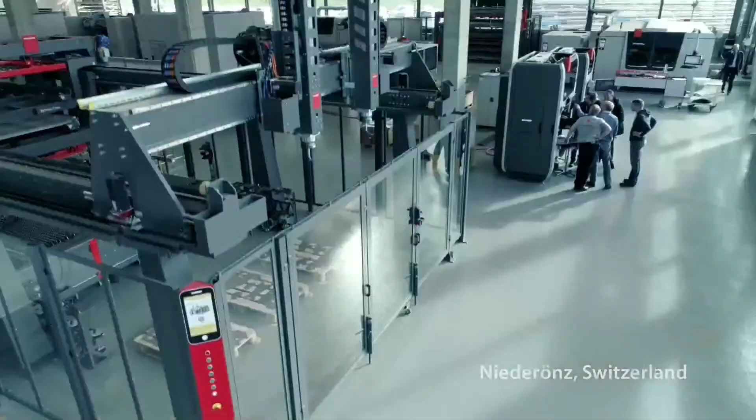Bystronic is a leading global supplier of system solutions for the sheet metal industry. We provide laser cutting systems, bending systems, automation, software solutions, and comprehensive services.

Sorry, I need a sip. He's good, no? Let's say he has a confident voice, yes. Shall we? Client happy, but please get to the end of the line this time and add a little verve. The verve is there. You may not be able to hear it right now, but you will in post-production. In post, we are in...

We offer worldwide presence and competence. We speak your language and understand your needs. We are here for you.

Sorry, we are here for you. I mean, I hear the words, but I'm not getting anything from them, you know? Could you please just say the lines?

May I? It means that we offer much more than just a machine. We support our customers with flexible financing models, training, maintenance, a long-term spare parts service, phone hotlines and online support. And we also operate local sales and support offices in many, many countries.

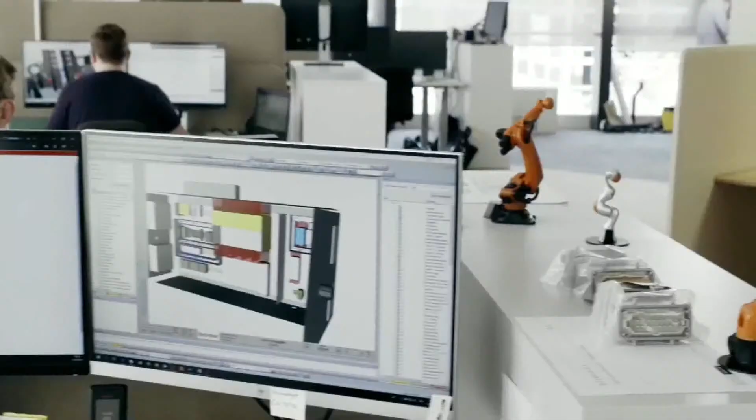We don't simply develop machines that cut or bend sheet metal. No, our customers need flexible systems for ever-changing order positions and batch sizes. Automation to achieve top productivity with integrated systems and the right software that cross-links everything.

Bystronic stands for Swiss quality.

Really? Swiss quality, I mean, it's a bit of a cliche, isn't it? And actually, while we're at it, your slogan, best choice, kind of sounds like we've just won the buzzword bingo. Guys, if you want to sort this out, I'm just going to pop out for a smoke.

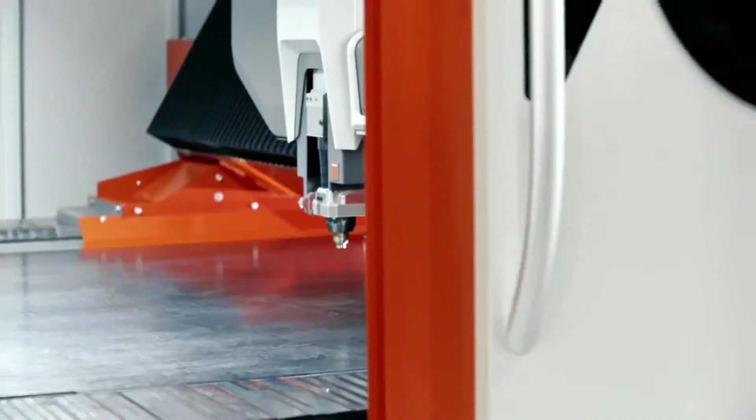Let me explain. First of all, Swiss quality. Do you know the Bystar Fibre? The Bytrans Cross or Bysoft? Have you ever seen them laser cutting and bending those sheets? It's like butter. Once you've seen it, you can't help but be excited. The beauty of a laser cut. The precision of a bent metal sheet, from very small to very large, but all with the precision of Swiss clockwork, perfectly formed and expertly fitted.

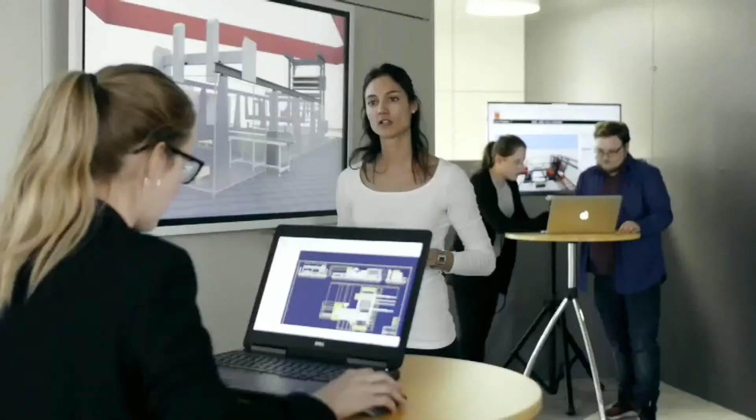Now, best choice. When you say yes to a partner, be it in business or private life, you make a commitment to the future. Bless you, Katie. Now, you're still young, but one day, you're going to want someone for the long run. Someone who shares your vision for the future. You see, at Bystronic, we think about tomorrow's sheet metal processing.

We have some footage of that, right? In what we call the Smart Factory, variable orders will be produced automatically on flexible systems. A clear vision and state-of-the-art technology means cost and process optimization, which in turn means higher earnings.

And who's behind this success? The employees of Bystronic worldwide. Now, you'll say that's just another cliche, but nobody else sets new standards like they do, with their enthusiasm, their ideas, and their know-how. Actually, I stand corrected, because our success is also due to our clients. It's their feedback that we use to develop new technologies. And until they are perfectly functioning, we will not launch them.

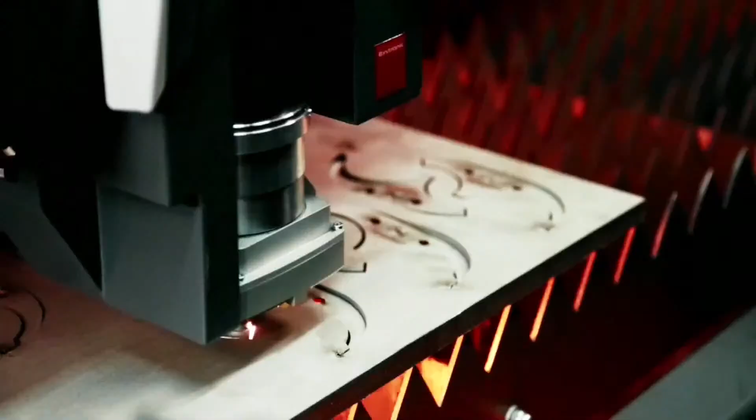And none of our employees will settle for less. Not in Asia, not in America, not in Europe, not in Switzerland, nowhere. And that's what we mean by best choice.

I'm sorry, I think I interrupted you. Did you record this? Sorry, did he say something? I couldn't hear a word. He says we're done. Really? That looked like more words to me. No, really, we're done. But you can stay here till 5 because it's in your contract. Well, no, I'm more than happy to do another version. We'll just reach my agent later on. That's no problem. Gentlemen? Hello?

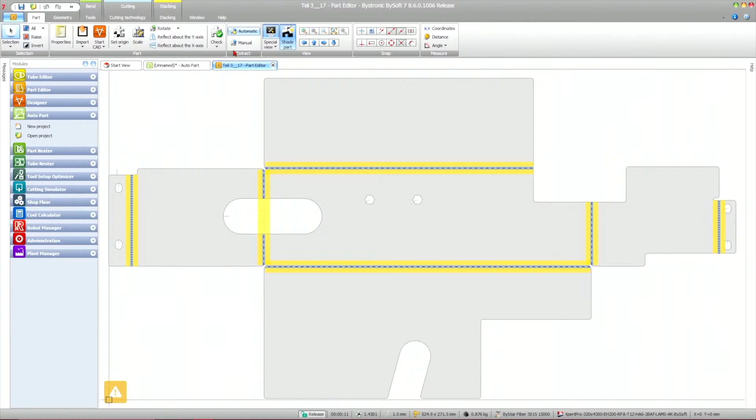Here you can see contours in the entry zone of the bottom tool. The software shows me quickly and easily where they are and highlights them with a yellow mark. Now I can automatically make a relief cut on the bend line and thus guarantee the quality of the part.

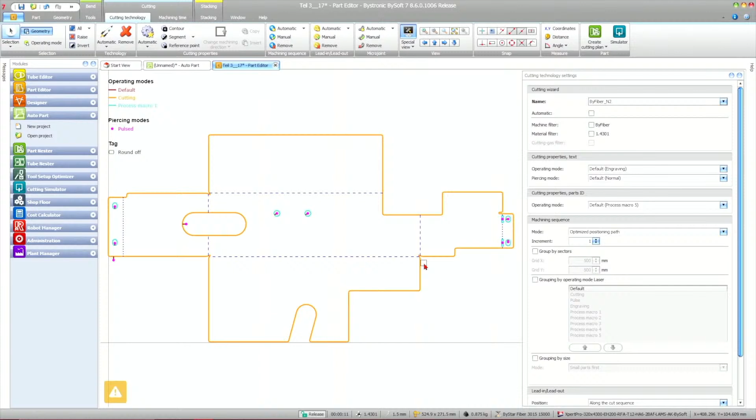Now I apply the appropriate cutting technology to the laser and save it. BySoft 7 processed all parts correctly and generated a laser and bending program. Now I can switch to the Tool Setup Optimizer module to generate a bending job for my machine.

I can now see the optimal sequence for these bend parts. I can see exactly when a tool change has to take place in order to manufacture the components as quickly as possible.

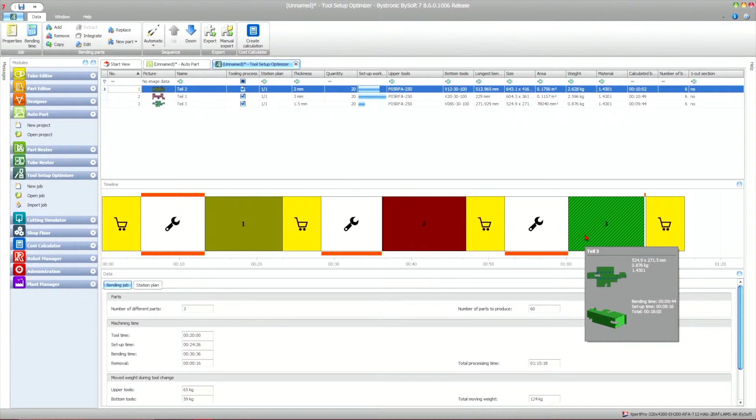In addition, the machine operator receives the ideal station plan, so that he always knows in which order he must install the tools on the machine.

What is still missing is the part cost calculation, so that I can send the offer to my customer. I do this with our module Cost Calculator. With this module, I get the cost of all my operations for my components within a very short time.

Bysoft calculates the material costs as well as the process costs for the components. Of course, the actual material consumption, as well as the number of pieces and the theoretically determined cutting and bending times, are also taken into account.

I can now send this offer to my customer and hopefully get his order just as quickly. With Bysoft 7, it can happen that easily.

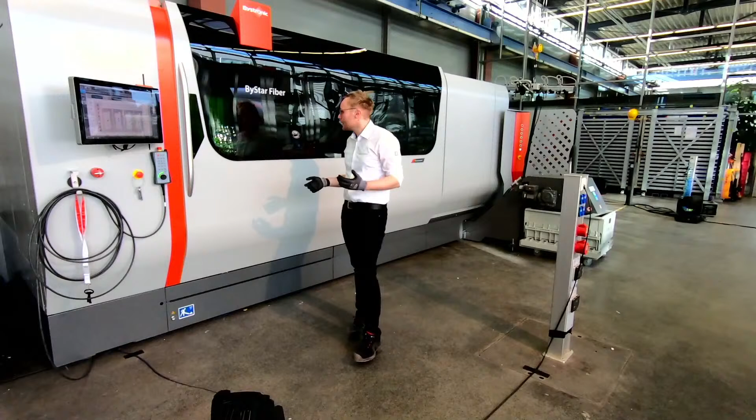So now let's start to cut. As part, we have prepared a 30mm mild steel part for you, to make sure that we can show you also the big parts, and this part we will use later on for something new. My colleague Carsten and Benedict will talk for this. And with this we can click on continue to start the cutting process.

So now the machine will start to cut the part. Yes, we will cut the part. We have two holes in it, a big gap. We start with the big hole, and we will have two holes with 30 and 25mm diameter, and we will have the outside contour.

You will see that we need some time to pierce into the material. It takes some seconds, but then we have a good and straight cutting time, which means that we are quite good. We cut now the part.

What we can also say is this machine has been set up last week, so we had finished this machine nearly at the beginning of this week. So it's brand new. On Monday, in our late night event we did for the German market, we put away the foil. We uncovered that machine together with Carsten, the boss for the demo center here in Gotha, and then we cut the first parts with that machine.

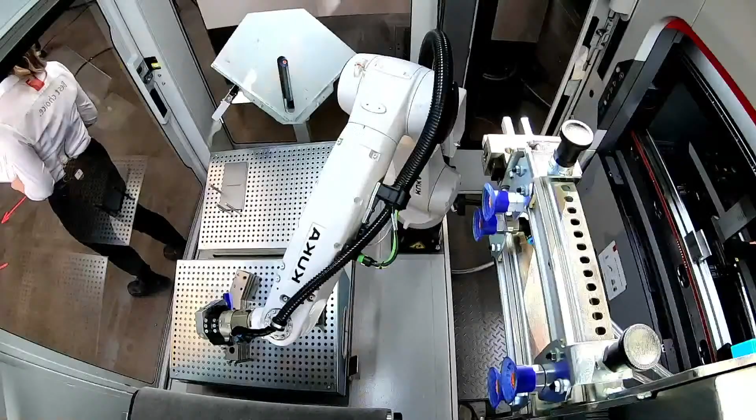So thank you, Eric, for this good news. This 30mm part is not only there to show you how fast and efficient we can cut even in thick material on our Bystar 15 kilowatt laser cutting system. It's also a part of Bystronic's future. Carsten, can you tell us more about Bystronic's future?

Thank you, Eric. You have been with us at the moment when one of the parts was born for our new Bystronic 120. That's a new upcoming bending machine. This will be the start of our new flagship series as well. It's the Bystronic 120, a new bending machine we will launch later this year. You have now seen one of the first parts. What is the highlight?

We can cut now these parts of the machine, for example frame parts. The frame is 30 millimeters, cut with our own laser, very efficient. And that's what we wanted to do here now with the first parts.

The Bystronic 120 is a new product. The idea came out when we did a workshop with customers. We do this several times a year with different groups to find out what new products are interesting for the market. This workshop was dedicated to automation, mid-size automation specifically. We already have the mobile bending automation for the Xpert 40 and Xpert 80, and we have the big automation, the bending cells, and we got feedback from the market that we need something in the middle. In this workshop we discovered we need also a new bending machine in the middle, not just the automation in the middle.

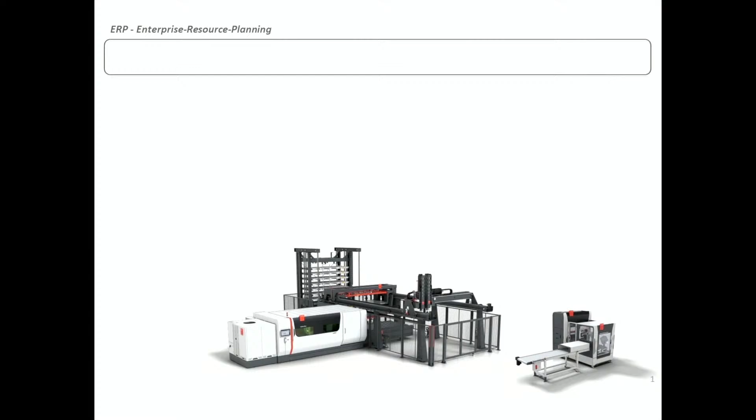Imagine your sheet metal production as follows. For example, you have a laser system with automation, a small storage tower behind it, a clearing area, and an automated bending machine. The entire production order, from quotation to shipping and invoicing, is managed in your ERP system.

You receive the parts from your construction, or as 2D or 3D data from your customer. The NC programs for your machine are generated in the production planning and programming department.

At the beginning, the customer's production order is created in your ERP system. All other data is thus already generated in digital form. At the same time, CAD data are also designed or made available, and these must now be transferred to work preparation.

This is where the Plant Manager comes into play. The Plant Manager is a module of Bysoft 7 which combines the order between the ERP system and the production. By using an XML interface, all production order data and also the CAD data can be automatically transferred to Bysoft 7. This means that the parts list with article number and material quality, as well as the number of pieces and the end date, are linked with the correct CAD data and automatically imported into the Plant Manager.

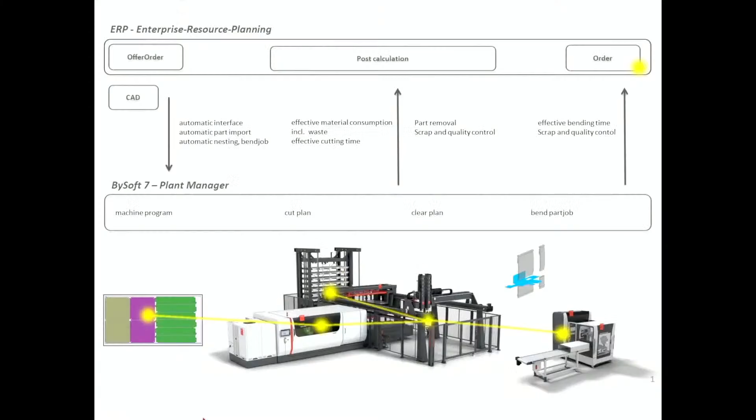Let's assume my customer ordered the parts and I want to manufacture them. The Plant Manager runs as a service and is installed on your server, so it works 24 hours a day, 7 days a week. If a production order is now created in the ERP system, it can be imported automatically.

In this view, I can now manage my orders. Open orders can be processed immediately. Incomplete ones require further information from the operator. My current orders are also clearly displayed.

In my example, I have a Bystar and a Bysmart Fiber with different laser powers. There are also 2 bending machines: 1 Xpert 250 tons and 1 Xpert 320 tons, each in 4 meters.

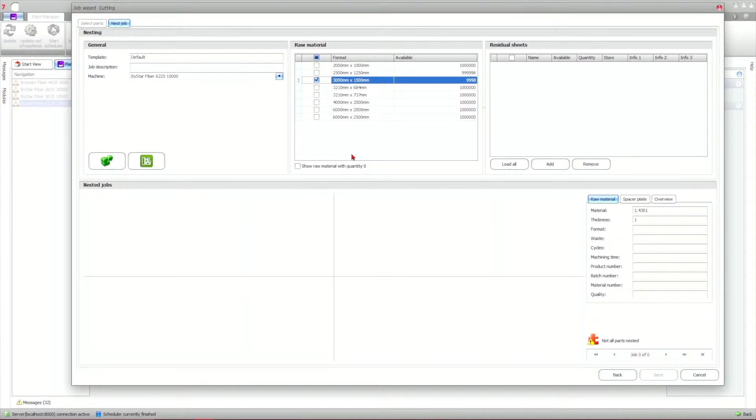Perfect nesting plans are now generated for the respective material and the respective machine. Residual sheets are automatically engraved and saved in the administration. All of these jobs are automatically scheduled in the calendar.

The bending jobs are also generated with a job assistant. All bending programs are planned in the perfect order on the machine.

You already know the module. It is the tool setup optimizer, which is executed automatically in the background and guarantees you an optimal bending sequence on the machine.

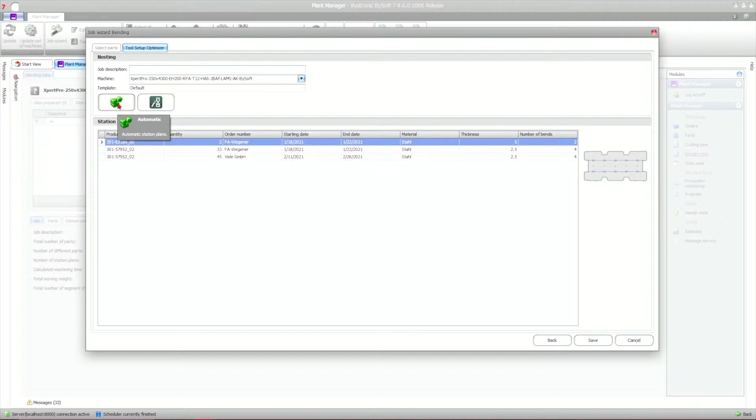Thus, all machines are perfectly programmed. To remove parts from the laser machine, the part removal module is available.

In the part removal program, the cutting plan is shown in color according to the order number, or according to individual adjustable categorization, such as the customer or a subsequent work step.

With this information, your machine operator clears the cut plan in the shortest possible time and sorts parts onto the correct pallets with little effort.

In addition, batch tracking and residual sheet management can be maintained via this module.

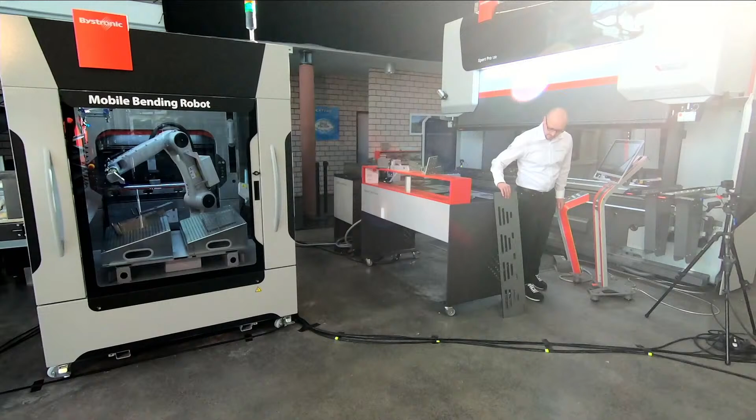Before we bend the part for the crowning, I'll explain a little bit later how you can program a part onto the control. You've seen the offline software BySoft 7. Of course, we can program the machine over this, and we can also use the control to program a part.

We go to new geometry, and then we can start to program the bend part. Let's say, like this part, we have 5 bends. This is really simple. We have the left side to draw something, and we have also the right side of the screen where we can type in main information about the material, the thickness, and the tools.

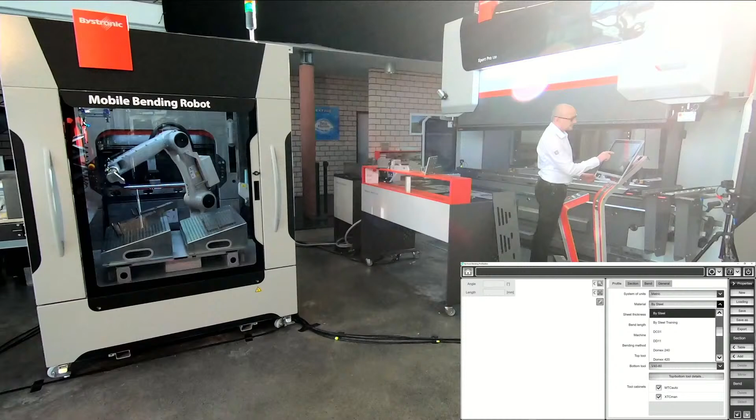A little bit explaining from top to bottom. Here is the selection of the material, then we have the material thickness. If you type in, let's say, 1 millimeter, we get a selection of the tool. You can adjust this to the best tool for you.

If I change back to 5 millimeter, this material is 5 millimeter, then we define the tools P7 and the B40. If you like to change, you can change it here in the list.

Maybe for the operator, they like the graphical view more. You have also the graphical view for top tool and bottom tool.

Okay, now we have the main information. Of course, the bending length we have to adjust - this is more or less the right one. Let me type in the exact bend length, and then we can program or draw the part.

We start on one point, and then we can slide with the finger over the screen to adjust the bend length. You can also type your part like this, 1, 2, 3, 4, 5 bends.

We also have a table or list view, and you can adjust your part over this as well. You see we have every time 50 millimeter bend length - this one I have drawn 60, and here we go also to 50, and the last one is 50.

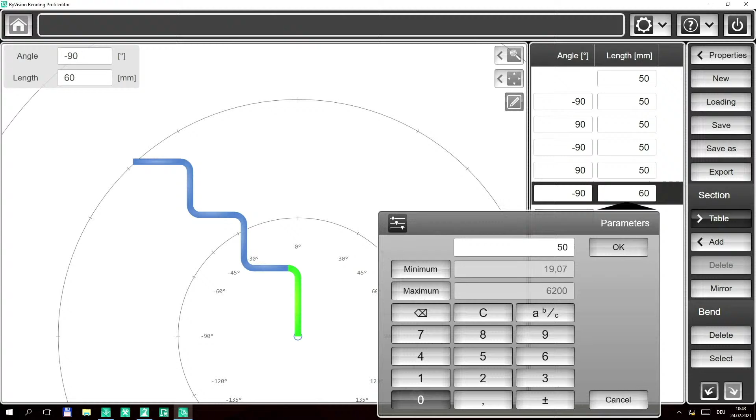Then we have our part. This looks like this. If necessary, you can open the properties field. In the section you also see the blank size - sometimes it's necessary to check if the blank part is the right one you'd like to bend.

If you go to the bending back, we simply just press the produce button - this little wheel on top - and the software goes into the produce area and calculates automatically the right bending sequence.

Of course, I need some tools for the part. You see there are some tools, but I need a little bit more. We can go to the tool setup plan and adjust the tools or place the tools manually.

On this machine we have the tool changer, so we can also use the tool changer. I switch just to the software for the tool changer. You see the green tools are the tools we need, and the blue ones are the tools already in the machine from the job before.

We simply press the start button, and then the machine changes the tools. During this time, the robot changed the tools. We will later explain a little bit more about the tool changer.

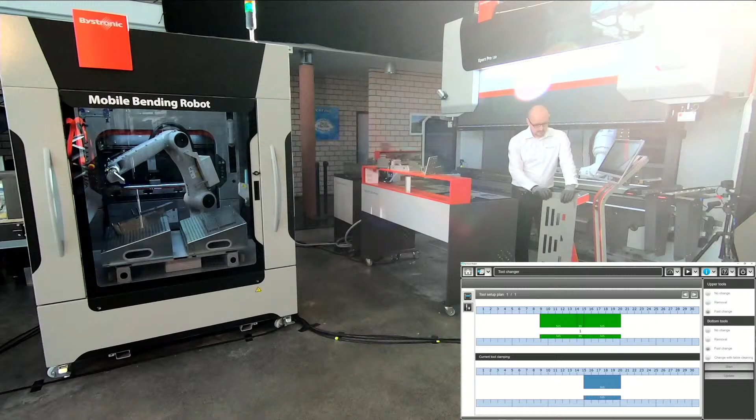I would like to explain the bend part a little bit more. For this part we will bend this. You have seen I have programmed the bend length for 1 meter or a little bit more, but in this part we have some holes inside that we can use to explain what dynamic crowning means.

Dynamic crowning means that we are measuring during the bending process what has happened during the bending - did we really need the calculated force, or did we use a little bit more or a little bit less in our case?

In this time, the software or machine automatically adjusts the pressing force and the crowning system. We have some additional compensation systems inside the machine - compensation for the side frame and also temperature compensation. Maybe we can look at this information later, and then you'll see what the machine is doing during the bending process.

In our case, we will first look at the crowning. Of course, the crowning is necessary to have a straight bend over the whole length of the machine, and also to have the same bend angle in the middle and on the right and left side of the machine.

Okay, the robot is finished. We will go back to the produce area. Let me switch on the compensation area and the crowning.

Here you see also what the machine does during the bending process. First of all, you see the machine adjusts something. I will bend just a small part, this little shape. I place this on the tools, and we do the first bend just with this little part. This is to check that the angles are correct on every step we bend.

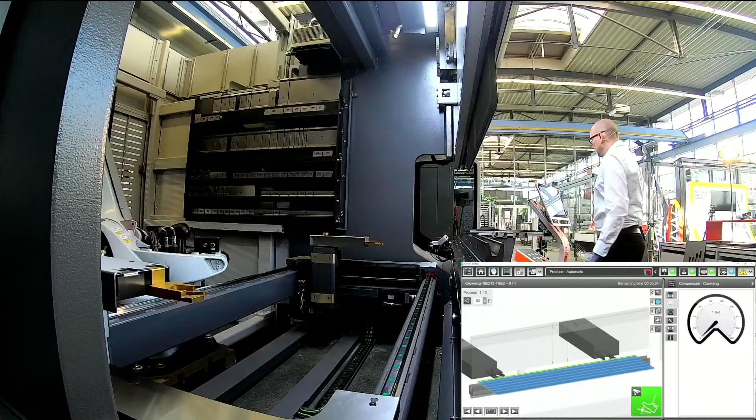Later on, you can also see on the screen on the instrument that we don't need so much crowning for this small part. First of all, of course, the safety system moves down to the right position of the tool. Now everything's okay, the safety system is green. This means I can move the machine in fast speed down. Then we do the bend.

Let me place the small part here on the side. Later on we need this again, and then I bend this part. You see, I go to the first step back. Of course I have to bend all the bends, and we start with the part with the holes inside. Then if you have a look for every bend on the control, you see that for every bend we get more and more crowning.

So during the bend we are measuring the real force on the left side and on the right side on the machine, and in this time we are in real time adjusting the crowning system and also compensating the side frame deflection.

So now we are on the middle of the part. The second to last two bends, we have more and more material, and you see that we need more of the crowning. Now we get the last bend, and this is the most crowning we need for this material.

And then we are finished. Let me place the part here on the side so you see it. I remove it, so this is the part. The first bend we did was this, and this is the last one.

And you can remember I bent the first little part. This is this one. If I place this here on my part, then you see this is exactly the same angle - there's no wobbling or whatever. The angle is on every place on the part, of course, the same one.

Why we are adjusting during the bending sequence the crowning and also the side frame deflection - let me go fast back to this compensation side. We can also look for all these values. We are adjusting automatically during the bend.

You see the first bend, second bend. On the blue sign, you can a little bit see what was the middle value of this system. This is for the crowning, the last bend, and let me switch to the compensation of the side frame.

You can look here or here. This is in millimeters - you see the side frame deflection. This is the last bend, and I go back to the first bend. You see the first bend had very little material, and we have less of this compensation.

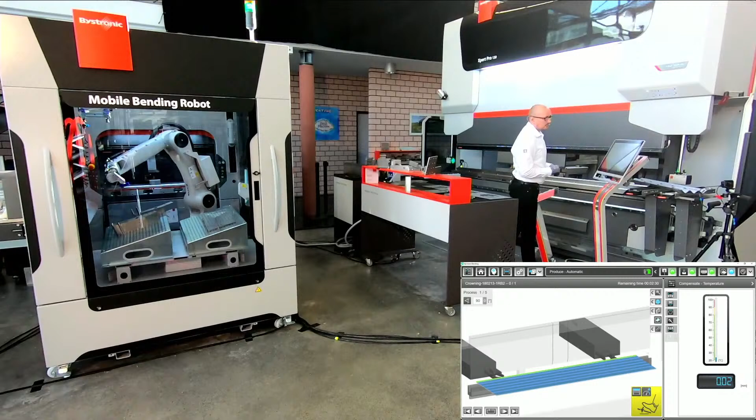We also have a temperature compensation. This is very little - the machine is not so hot today. We also have a system that stops the hydraulic if I don't need the hydraulic. And this is how the software, or how the machine, works with the dynamic crowning.

Okay, now we have a straight bend line over the whole length. The next point is, if I need the right angle the first time, then we can also use the LAMS system. Let me show this on another part.

This looks like this. Of course, we have to change the tools again, remove and start, and the robot will do this from behind. And I can explain a little bit about this part.

The blank part looks like this. We have different bends on this part. Of course, we also have some holes. This could be a little bit difficult for the LAMS system.

Of course, this is a laser-based measuring device, and if you have some holes, you have to look so you don't measure on the holes. If the holes are a little bit smaller like this, then it's not a big problem, but for the bigger holes, of course, you have to look.

Otherwise, the length we need to measure the exact angle is around 15 millimeters. You can also say we can measure on one side of the part, and on the other side, if you have the same angle or you cannot measure, you will see it on this part. We have two bends we cannot really measure.

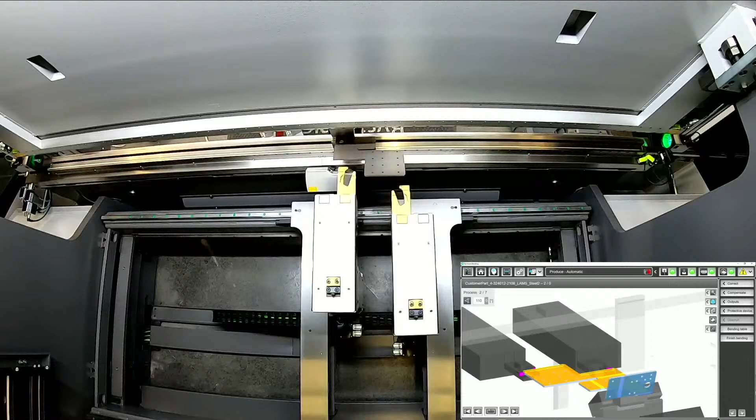I hold the part like this. You see these two bends we can measure, and the next two bends the part is very close on the table. For this we cannot really measure, so in this case I just take over the measured value from the bend before and do the same correction. Like this, and this one is the same.

Then for the next bend, this is a 90-degree bend. Let me look on the control how I have to hold the part in the right way. Of course, we can measure again in front and back. For the second bend, normally I could also measure, but in this case I take over the value from the first bend. So you don't need to use it for every bend, and the last bend is a little bit different, as I explained before.

Just in case the material could be very difficult, or you have a special material and you'd like to measure the springback, then we can also use this mode. This means the machine does the bend, you will see it from the side. Then we release a little bit the material, measure the springback, and re-hit in one step and do the correction, and then we are finished. Then we have our finished part, first part, the good part.

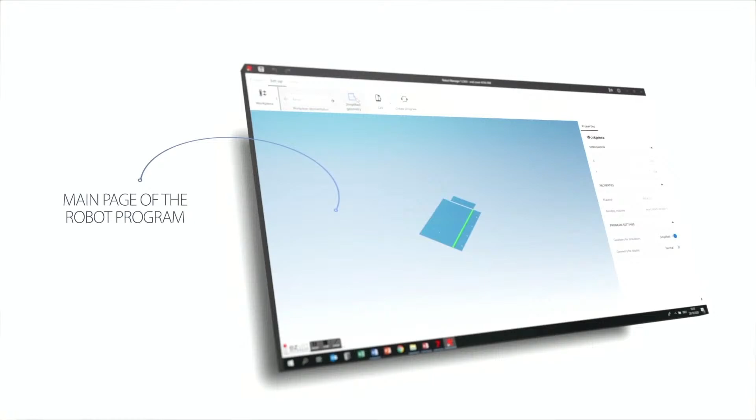And here we have to choose, for example, the cell, the grippers, and everything. I can check my part again, double check it. All right, this is the cell. So I see my pickup pallets here, I see my chute, I see the machine. I can switch different things on and off. Normally I want it like this - this is the easiest way to program.

So what I need to do here is choose a gripper or a vacuum cup. That's what I did, and then I make a program. I can verify all this. I don't want to do the dual sheet detection - I know that my parts don't stick, so I'm fine.

Create a program, and it will now make blocks. For this program, I need 2 blocks for the bending. They're right here at the bottom, and then home position, pickup - that's where I am now - reference, and drop it in the chute. So this is where we are, and this first bit is about the part itself. So I need to tell the machine where the part is. I say, yeah, it's here, it's fine.

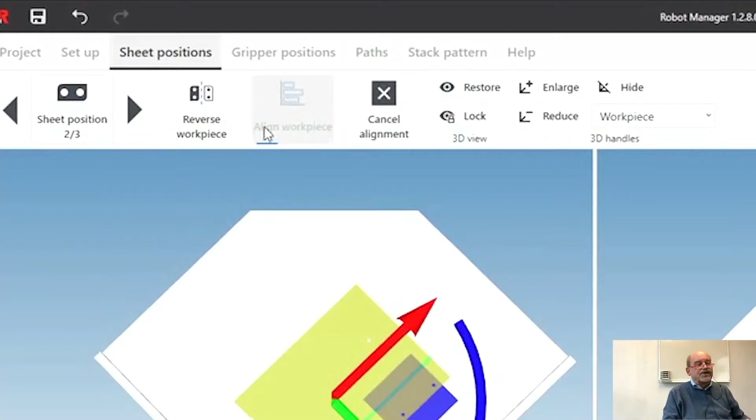Next position - what we've tried is to use as little as possible this side here where the numbers are. I don't want to type numbers, I hate numbers. So here, this is the reference table. Parts should drop in this corner. So what I do is let it drop - we calculate, we have a physics engine in here: friction, gravity, inclination, and it drops right here in the corner.

So we're good. Last bit here is how am I going to let it drop in the chute here. Chute like this - maybe put it in a little bit more, a little bit more. There, that will drop, no problem. And once I've done that, I'm finished here - there's no more black arrows.

So next one is the gripper positions. I need to do the same thing again. And what we've done here, something very clever: I have a before and after view. So if I make a movement here, I can see the result of that movement here. So if I make this movement too big, then it results in a crash here. I don't want that, so I put it back. Normally what we calculate is pretty good - you don't need to touch it.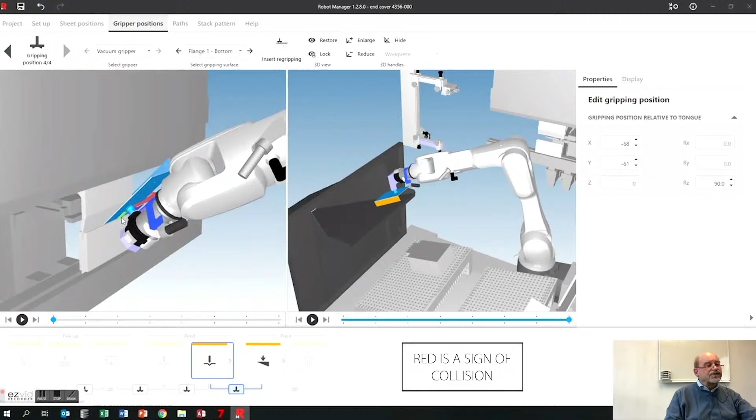So next position, from here to here, that's fine. And then first bend, second bend, and then drop it. Again, if I want to move something, I can move it, no problem at all. Put it back. And again, of course, if I touch something, it will get red, and that's basically a bad idea. I leave it like this, so that's basically it - at the bottom, everything is yellow.

That means I've done it, and now I need to create the robot program. So first I hit this optimize configuration. Now the software tries to eliminate unnecessary movement. It's done that already, and then check.

Now it's connecting all these blocks together, and if there's a collision between blocks, like I have here, it's red. This is red, there's a collision. Also these little dots indicate the collision, so if I go there, I can actually see it. It will go through this thing here. That is not a good thing.

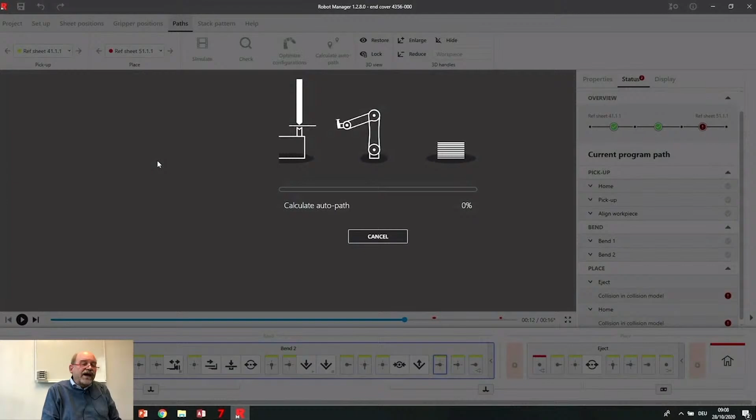But we've noticed this collision, so we've already done the next step. We've created these two blocks in between the other blocks. These two red blocks are points in space which have not been calculated yet. But if I push this button, it's calculating. So we add points in space, and now I have a complete collision-free robot program. So this is it, this is done.

What I can do now to make more autonomy in the cell, for example, I can make a stack pattern. Here I can say copy this one in the Y direction, so I've got two now. I can enter my pins. I want a pin here, I want a pin here. This is for the operator, to shift his parts against.

One here, and I see that this one is red now, so I need to move it a little bit more, like this. That's okay. And then I can do the same thing for the place position, that's here. Again, I can just say copy this one, copy it once more, like that. Yeah, fine, so I don't get a big pile in the end of my pallet - I get a nice three little piles.

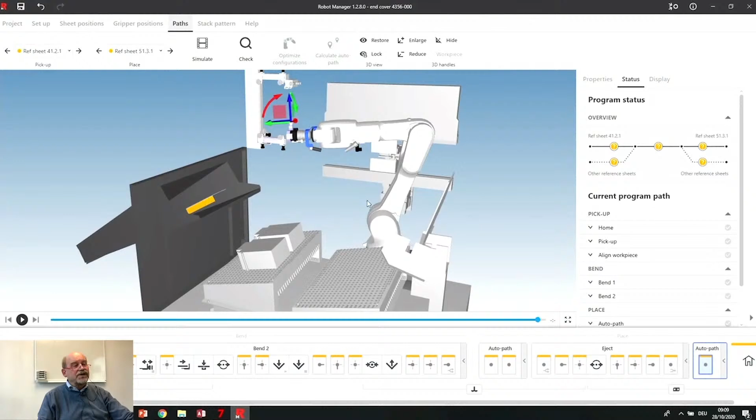That's much better. I need to calculate these parts because I've added positions, so I hit check again, and it will recalculate everything. The middle bit will stay the same because I didn't change that. Now I have new positions - everything's green. The pickup positions are here, and these are the chute positions. Everything is done now.

I can run this. I can choose here which one I want to see - this is the first one, reference position here, it's the middle one. So let's simulate this.

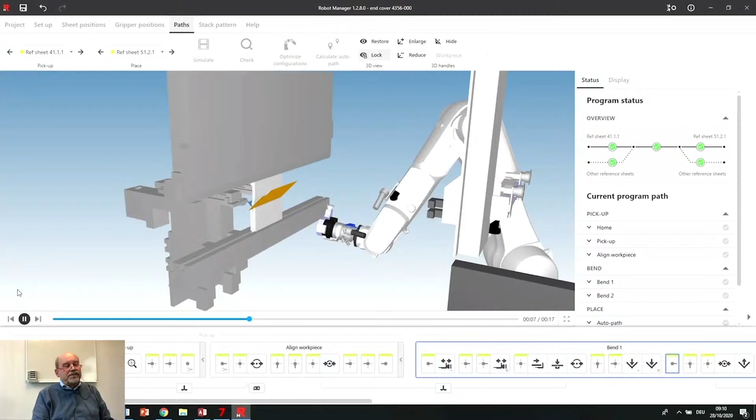We choose the views automatically, so the operator can see exactly where the movements are. This is happening 100% in real time in the cell also. You can lock the view with these little buttons here, so now our program will keep this view until the end of the simulation. I will unlock it because otherwise we can't see where it drops the part. So bend number one, bend number two.

So, without all my talking, making a program like this will take two to three minutes maximum. Of course, if it gets a little bit more complex, I'll need a little bit more time, but it's still super easy to make programs with Robot Manager.

I'll unlock this again, and then it will put it on the output here, and then it will go back to the home position. So that's it, I need to save this part, and I need to export it to the machines.

That's what I do here - save, and then here, and it will also make a drawing showing where the operator has to put these pins, the pins for the table, so he can put them in the right position. And that's it, I'm all done now.

Another little feature in our Robot Manager: of course, when you do some automated production, you need stacks to pick your parts up, and it would be nice if you could have stacks also to lay your parts down. That's what I'm going to show you here on the Robot Manager.

So I've done the part, it's the same as before. I've changed the cell, so now I've got an 80-ton, 1.50 meters, and I've got this conveyor to show you better what I'm going to do. So this is all green like before.

And then we have to go to the stack pattern. Here I see my pickup place, and the easiest thing to do would just be to go here and say copy, duplicate, and then it made another stack. That's easy, make one more - there, I've got three stacks already.

And then I can also duplicate everything here to another pallet. This is the other pallet, duplicate here, so now I've got already six stacks, so this can run for hours and hours. I'm going to take them away again and show you some more details - here, pallet 41, that's this one here, also this one here.

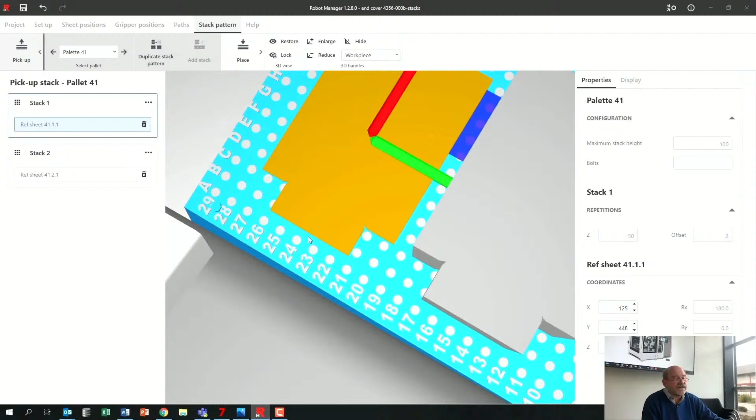Let's leave these two stacks because it's not done with only the stacks. I need to put these pins in. I need to reference the parts. So I'll put a pin in here and I'll put a pin in here.

This is fine. You can push your part against this pin and then it's referenced. Same thing, I'll put a pin here. It's there already. And one here.

If I duplicate the stack now, it also duplicates the pins, of course. What's happening is we're checking collision with these pins - first the parts against the pins, but also the robot against the pins. If you put everything full of pins here, the robot cannot get to the last sheets on this stack anymore.

We also simulate and make the program in the way you've put the stacks down. So this is the first one, second one, third one. You cannot start here in this corner because everything would be full with parts. It doesn't work. So this is okay.

You can still see there is a little bit of space here, but that doesn't really matter. The moment you touch the pins, it gets red, but it doesn't need to be that precise. If you're within, let's say, 5 millimeters, that's good enough. You don't need to make really precise, super neat stacks - they're going in the reference table anyway, so you're good.

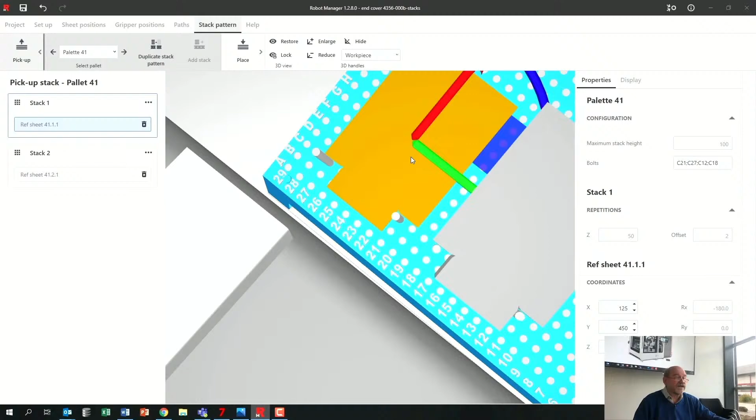We also have customers who just put this stack against this one, so they save pins and of course they save space also. So this is the pickup stack, and then we go to this stack here, the place stack.

One part already, and again here, I'm just going to copy it. There, I've got a second one. And then I'm going to put a third one on top of it. Since we don't have an automatic function for that, I need to move the part up a bit, move it over, and then maybe twist it a bit like that.

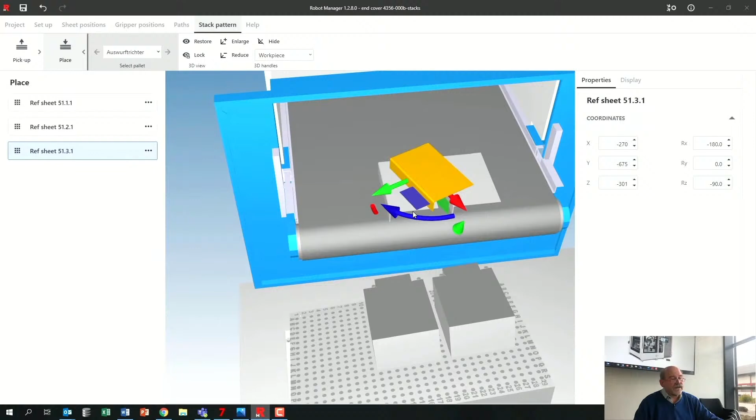And this is my output stack. So very easy to do that, no problem at all.

And then what I still need to do is, of course, make the program for all these things, because I've actually made now different programs here and three different programs here.

So I go back to paths. Here we see it's like a little railroad. This is the original one, and these are the ones I added. Also here I see the other references, and here I see three place stacks.

So I run check again. It's going to simulate everything again. Once this is green, maybe it's not all green, maybe I need to change one or two positions. It's all green, great. So if I want to see that last one, this one here, the second stack...

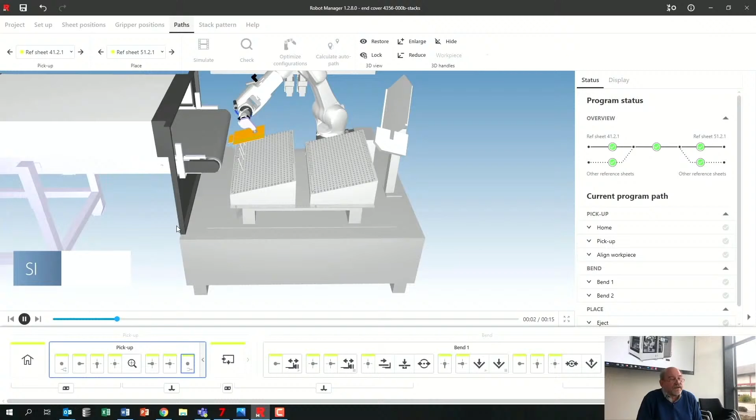Then I can simulate it, and you will see here at the beginning that we will pick up from here. So it's already made the program, I'm just showing you the simulation. So running through, referencing, and it's going to do the two bends.

So I've actually made now 5 little different programs. You can use up to 4 different parts in our cell, the little cell. So you can have 4 different parts on these 2 pallets, and the moment your tools are okay, you can swap between parts automatically. We make a job list, and you can swap from one job to the other automatically.

So you can have an 8 hour run in that cell, no problem at all. It is already the last bend, and then it's going to put the part on the conveyor there where I put it - this is the second place. And there we are, program done, everything done, we're good to go. Thank you.

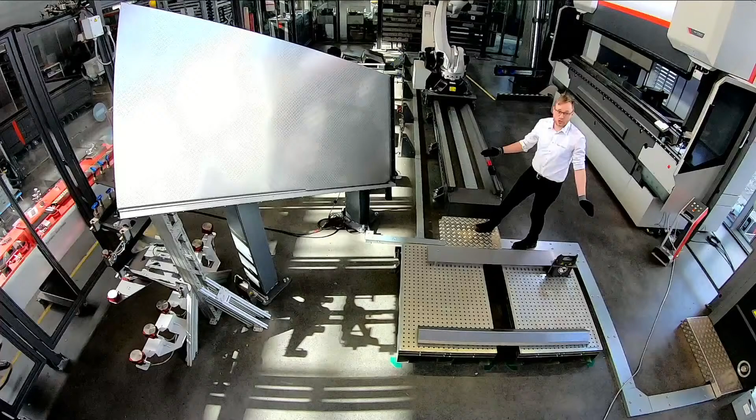We have 2 steel pickup pallets with these pins. You will see later on the mobile bending robot also for picking up your parts. In our setup, the pallets are here, but we are also quite flexible with the layout of this machine, so you can have them also at the other side or wherever you need to fill up your parts. We have here attached a separation magnet to separate the parts, to make sure that we only have one attached to the gripper.

Then we have our alignment station here to align the parts, and this is also equipped with double sheet detection to detect the perfect part and make sure we don't have 2 parts stuck together. That's the check for it.

Then we go a little bit around to the machine. We have an Xpert Pro 150 ton by 3 meter machine attached to this bending cell, but we are also able to have the full range of the Xpert Pro machines in our bending cell. So you can have a 100 ton up to a 320 ton machine, and you can have a 3 meter machine or a 4 meter machine.

This bending cell is at the moment sold to a customer, so we will replace this with a 4 meter machine in the near future. So feel free to book also a demonstration for a 4 meter machine.

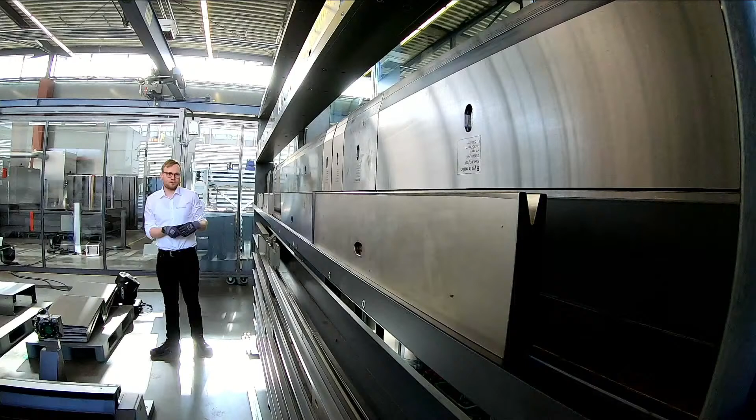If we go further to the back here, we have our tool cabinet with various tools. So we can have V6 up to V120, also with the big bending cell, and a various range of upper tools.

When we go more to this position, we see 6 set-down pallets. In this case, we have a customer part we will pick up from one of the set-down pallets or the set-down row and put it next to them.

Next to this, we also have our gripper trays. So we have 5 various grippers attached, or can put them into the machine, but one of the trays is reserved for our tool change gripper, because the bending cell can also automatically change the tools.

Some words on the robot: we can have a robot from 90 kilogram handling weight up to 270 kilograms. So we have various robots in between to make sure that we have the perfect one for your parts.

And with this we will close the cell and start the first job, and then we can go to the next machine.

So the robot will start now to produce the part.

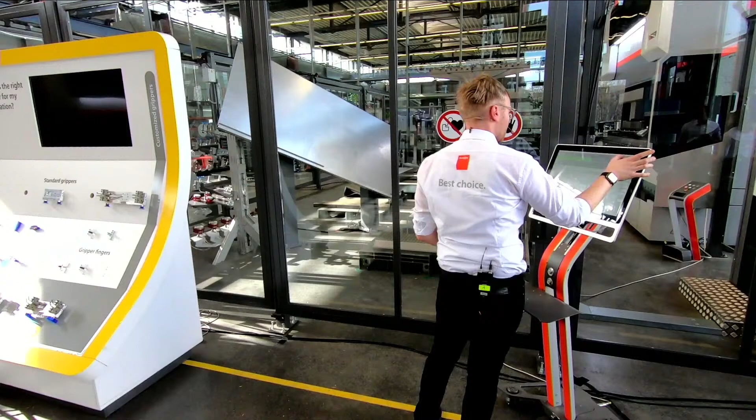So we go to the pickup position, pick up the first part, bring it to the alignment station. The back gauges will position to the perfect place. Double sheet detection is done, and then we go to the first bend.

At this time we reorientate the gripper, but we are also able to use the following function to follow the sheet with the gripper during the bending process if you have bigger parts. So next, the bend.

Attach it and bring it to the set-down position to set down the part. And now we let the cell run and go to the modular tool changer.

So maybe you had seen the modular tool changer a couple of seconds before at the presentation from my colleague Ronnie. He used it also for his part, because we are, most of the time, quite efficient operators looking out for our backs, to make sure that we don't have to handle so heavy tools the whole day. So that's the reason why we try every time to use the modular tool changer.

I will just say some words about it. What is new with this machine is smart segmentation, or smart routing. So we can also shift tools during the changing process, which makes the tool changing process really quick and efficient, and we save time. With this, we will start the tool changer to make sure that we can change the tools, and then we can start to bend the first parts, and in this time the tool changer will change the tools.

I will go to the mobile bending robot, so I will start up the program. We have equipped this mobile bending cell with an Xpert 40 in the back. We have a robot which can handle parts up to 10 kilograms with a maximum size of 300 by 600 millimeters. And we have attached a conveyor belt to set down the parts properly and feed them out using an automated conveyor belt.

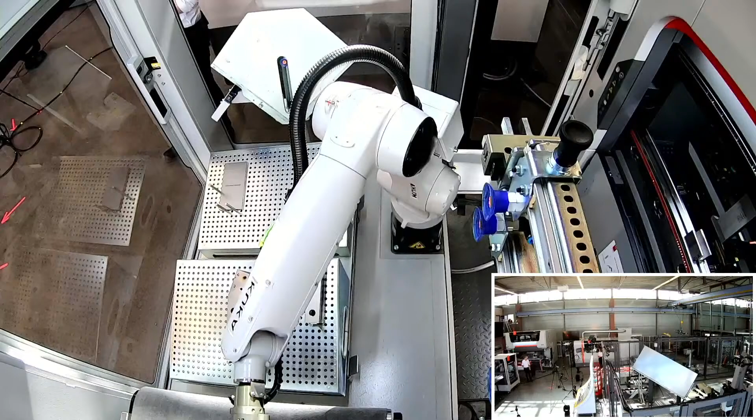We can also have this mobile bending robot with the Xpert 80, so 80 tons by 1.5 meters. But in this case we have attached an Xpert 40. Again, we have two pickup pallets, steel pallets with pins in them. We have an alignment station to align the parts. We have a regrip station with 4 suction cups and a clamp gripper. And we can easily change the tools by hand using our RFA clamping or the XPT clamping with this machine. If you need further information on any of these 3 machines, make sure that you book a demo using our landing page.

And now we can let the machines run a little bit through the whole time. They can produce, and I can go have a coffee together with my colleagues. So all machines were working now, and we are good to go on with Sarah, and we let the machines run some seconds more. Okay, back to Sarah.

Well done, Eric. Our expert, Benedict, will tell you more about automation now.

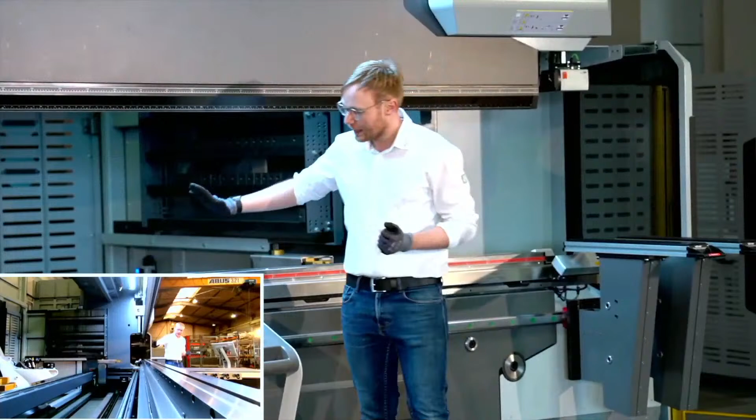New for this machine type, for all experts now, is the optical bend guiding system in the table. So you also have the possibility to see where you have to put your lower tools into the tool clamping.

Basically, the Xpert Pro machines are available in 3 speed classes, starting with the Classic Edition, going over the Performance Edition, and on the top side we have the Dynamic Edition, which we have in the back here, so we can handle up to 25 millimeters per second of bending speed.

We have also equipped the safety system for your operators to keep them safe, which is electrical height adjustment. It's called Fast Bend Plus, so it will every time fit to the correct programmed height of your tools.

Also the machine is equipped with the laser angle measuring system to make sure that your first bend is a good bend and your first part is a good part, and that you can measure and also correct the angle during the bending process.

What I have forgotten, we have a sheet support here, the small one, which can handle up to 150 kilograms. We are able to have 2 on this machine type. In this setup we only have 1, and we have 2 support arms to handle as best as possible for your operator. Yeah, that's basically everything around the machine.

Now we go in the backside to see a little bit and talk a little bit about our modular tool changer. So now I want to show you also the inside of the modular tool changer.

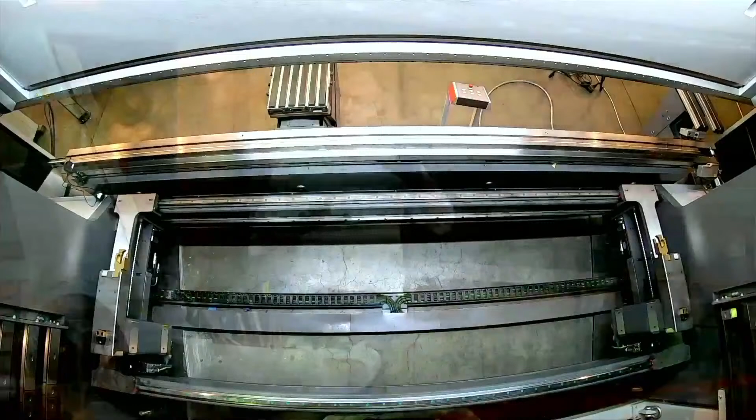And what we see here also, which is basically fitted to the machine, are the backgauges. We have a 6-axis backgauge system with some bigger and thicker fingers to also make sure if you have a stronger material, that you have enough space to put them against the backgauges and have everything correct.

What we see also at the top is the turning station of our modular tool changer to rotate tools. So we can also rotate the tools fully automatically using the robot. And now we will go outside again and see how the robot will change the tools.

So, we had seen the tool changer in the back and talked about some specs of the tool changer. Now we want to see that the tool changer can also change some tools, and I can relax a little bit.

I just prepared a part, and we switch now into our ByVision robot, which is the control software for our robot. What we can see in green in the upper section of the software is the tools we want to change in now: a P7 and a V80.

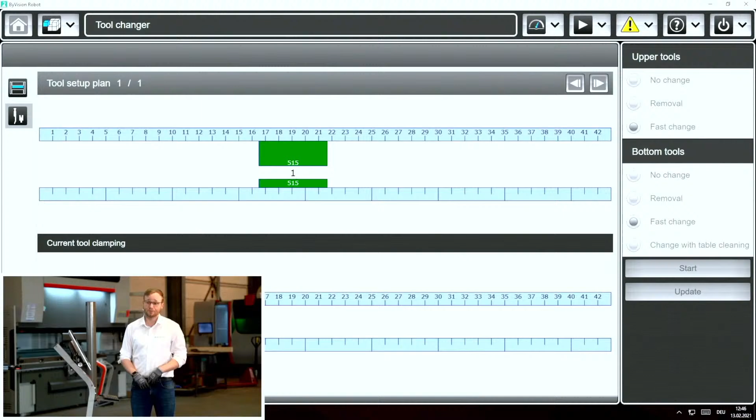To change, we only click on fast change and then start the tool changing process. The robot will come now in front, and then he will wait some seconds till the tool clamping is completely open, and then he starts to change the tools.

As I talked before about the optical bend guiding system, you see now where the robot will put the tools on, in the lower and also in the upper tool clamping. And in the time I've spoken to you, the robot will change the tools, so your operator is able to do some other jobs around the machine, and the machine will automatically bring the tools in.

So the tool clamping is closed, robot is parked, the job can be started now. We don't want to start the job now, we want to change some tools, so I just swap the job to another one.

Open it up, and now you can see on the lower position of the screen the current tool clamping, and on the upper one you see the tool setup plan, which is now needed for the next job. For this we also can click on start to start the tool changing process.

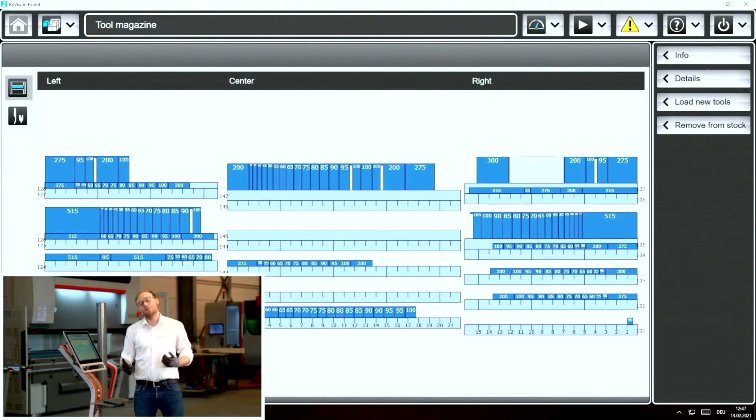What is also in the software, quite simple, is an overview about all the tools we have stored in our tool changer. We can have some information about what length we have here. We can see some details about the tools, and we are also able to change really quickly the new tools into the robot. So if you need new tools, you don't need a technician from Bystronic.

You are able to do it on your own, so you just hang it in and use the laser sensor to measure in the new tools. And what you had seen also, he just kept the upper tool, the one segment for this job, so we need this for the next one - he only built up the additional needed tools for this job and kept this segment in place.

So this job is loaded, tool clamping will be closed now, and the robot will park - we can go on to bend. Processing is finished, and for the third job I just take another part for us. It's a 2mm steel part, as we see here.

We go on production mode, and what you can see here is a rotated upper tool. As I talked before, we are also able to rotate upper tools. That's specially needed when you have gooseneck tools - then you will maybe rotate them to give your operator more safety in front of the machine.

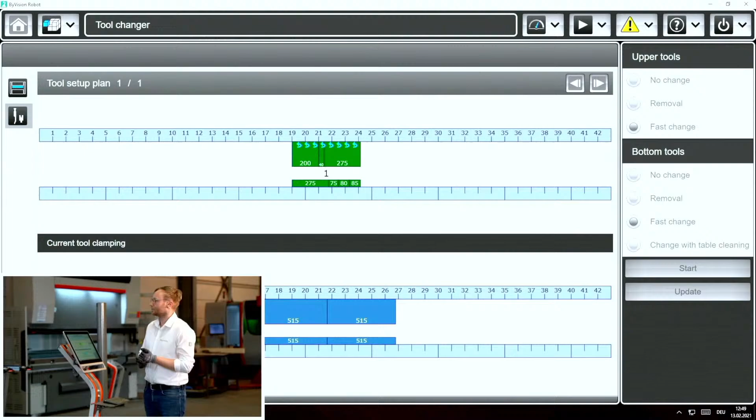For this, we have the turning station I talked about before, and we can click on start, so he will remove the old tools and bring in the new ones. First we will remove everything, and then we will go to the new tools.

So we're now in the position to rotate everything. Maybe some words about the minimum tool section or minimum tool length we have: in the lower tools we have like 50 millimeters, and in the upper tools we can handle tool segments from 30 millimeters. So one more second for the lower tools.

And when we see now the tool coming into tool clamping, you see it's rotated, so we don't have any issues with the operator, and the gooseneck is now in the back of the machine.

So we have two more segments for this: a 200 millimeter upper tool segment. We are also able to rotate 515 millimeter segments, so the turning station is really big enough for this. And all tools we have in our range of tools we can handle with the modular tool changer.

So one more segment to go. 275 millimeter P4, again to the turning station.

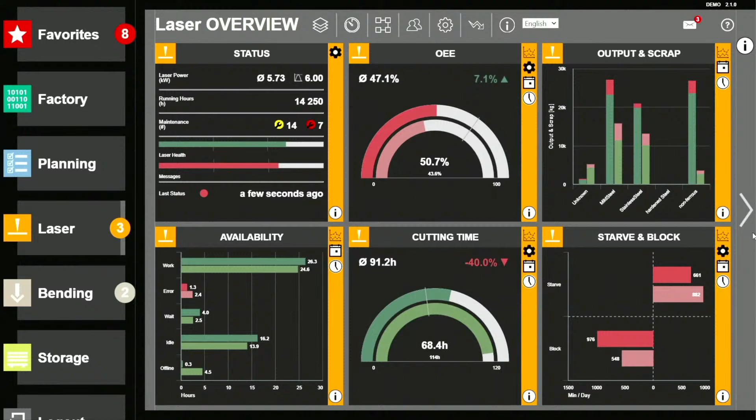From the laser overview, you can break down to each single laser machine with a video stream and also the status of each machine.

In the tab Bending, we also have the bending overview. We have the performance of all bending machines and the time between the different bends. From the overview, we can break down again to the single bending machines and have all diagrams - you have over 25 KPIs.

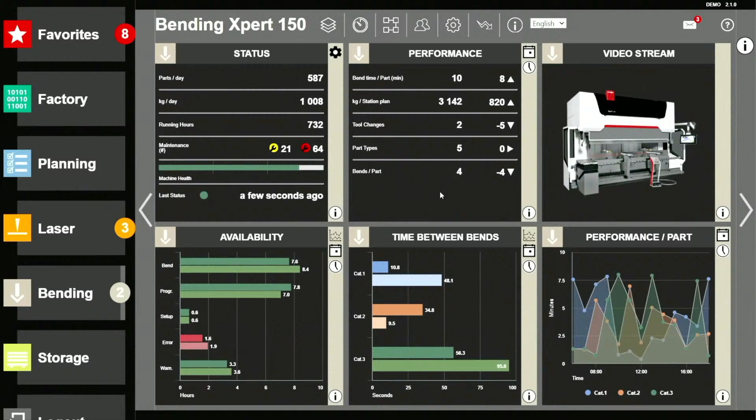And in the tab Storage, in combination with the Plant Manager, you have the value of your storage, the material rate, and the range. And all in all, you have the messenger service to have everything directly on your mobile device.

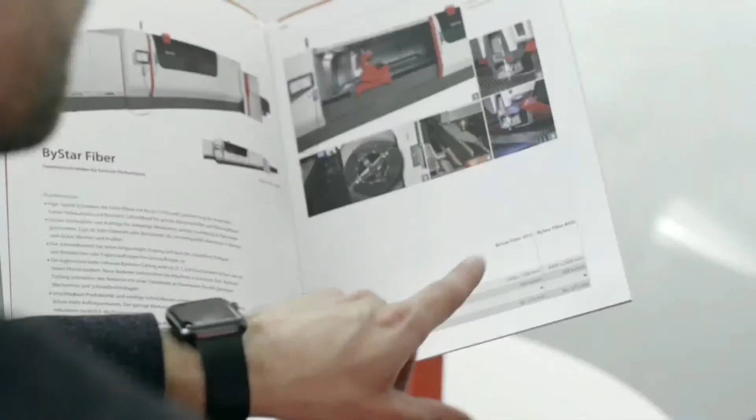We offer worldwide presence and competence. We speak your language and understand your needs. We are here for you.

Sorry, we are here for you. I mean, I hear the words, but I'm not getting anything from them, you know? Could you please just say the lines?

May I? It means that we offer much more than just a machine. We support our customers with flexible financing models, training, maintenance, a long-term spare parts service, phone hotlines and online support. And we also operate local sales and support offices in many, many countries.

Yes, now you see, now it's coming alive. We should be saying this. It is more text, though, so we will have to renegotiate with my agent. Can't you just record it and we'll look at it later? Well, I'd love to, but my agent would kill me. If only. Fine then, continue with the script. Right you are. Where were we? At customer service and post-sales services, would you believe? Rolling.

We don't simply develop machines that cut or bend sheet metal. No, our customers need flexible systems for ever-changing order positions and batch sizes. Automation to achieve top productivity with integrated systems and the right software that cross-links everything.

Bystronic stands for Swiss quality. Sorry, really? Swiss quality, I mean, it's a bit of a cliche, isn't it? And actually, while we're at it, your slogan, best choice, kind of sounds like we've just won the buzzword bingo. Guys, if you want to sort this out, I'm just going to pop out for a smoke.

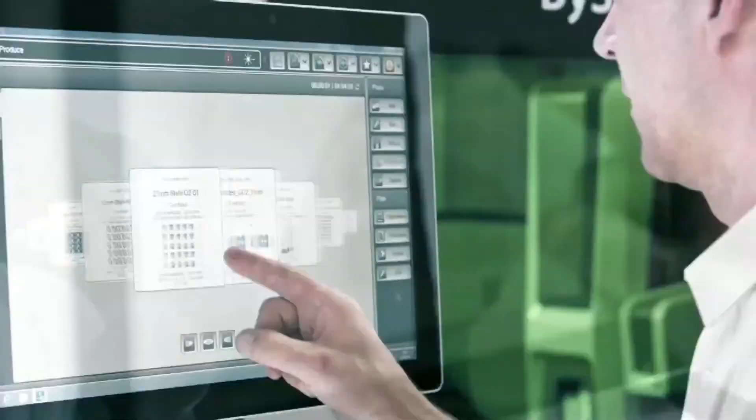Let me explain. First of all, Swiss quality. Do you know the ByStar Fiber? The Bytrans cross or Bysoft? Have you ever seen them laser cutting and bending those sheets? It's like butter. Once you've seen it, you can't help but be excited. The beauty of a laser cut, the precision of a bent metal sheet, from very small to very large, but all with the precision of Swiss clockwork, perfectly formed and expertly fitted.

Now, best choice. When you say yes to a partner, be it in business or private life, you make a commitment to the future. Bless you, Katie. Now, you're still young, but one day, you're going to want someone for the long run, someone who shares your vision for the future. You see, at Bystronic, we think about tomorrow's sheet metal processing.

We have some footage of that, right? In what we call the smart factory, variable orders will be produced automatically on flexible systems. A clear vision and state-of-the-art technology means cost and process optimization, which in turn means higher earnings.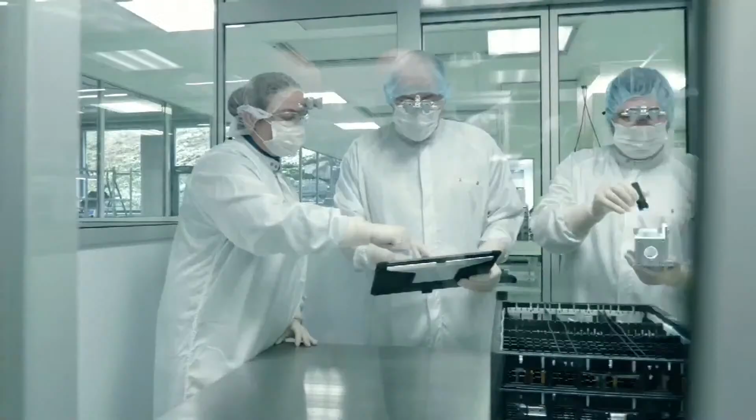And who's behind this success? The employees of Bystronic worldwide. Now, you'll say that's just another cliche, but nobody else sets new standards like they do, with their enthusiasm, their ideas, and their know-how. Actually, I stand corrected, because our success is also due to our clients. It's their feedback that we use to develop new technologies, and until they are perfectly functioning, we will not launch them. And none of our employees will settle for less. Not in Asia, not in America, not in Europe, not in Switzerland, nowhere. And that's what we mean by best choice.

I'm sorry, I think I interrupted you. Did you record this? Sorry, did he say something? I couldn't hear a word. He says we're done. Really? That looked like more words to me. No, really, we're done. But you can stay here till 5 because it's in your contract. Oh, no, I'm more than happy to do another version. We'll just speak to my agent later on. That's no problem. Gentlemen? Hello?